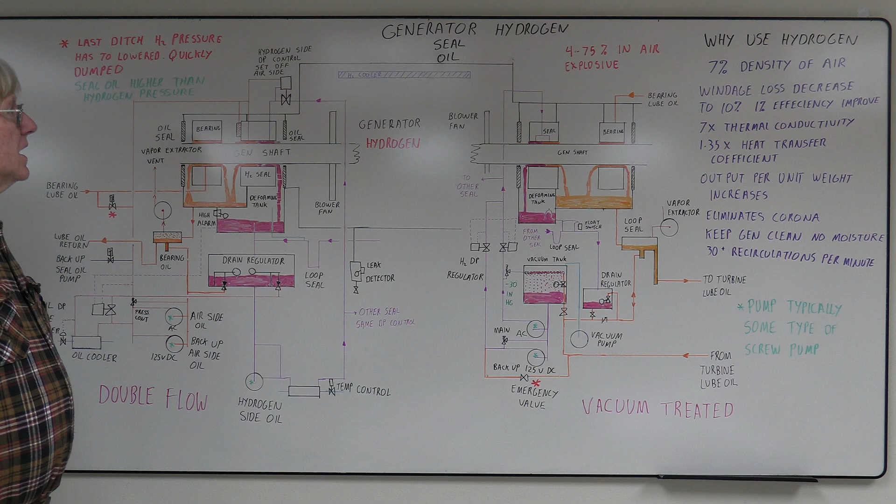Okay, it's our hydrogen generator seal oil video. Have to apologize for the mess. It started out as kind of a clean drawing. Now it looks like a seal oil skid. Time we put a lot of the stuff on it.

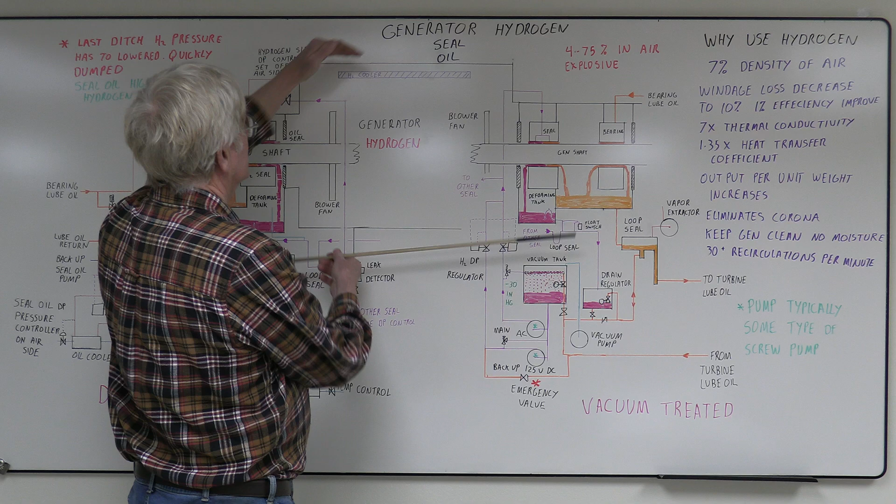The basic layout of this drawing: this part here is the actual generator. You have your hydrogen cooler. Some have them on top, some have them on the ends. But you're using water to cool the hydrogen.

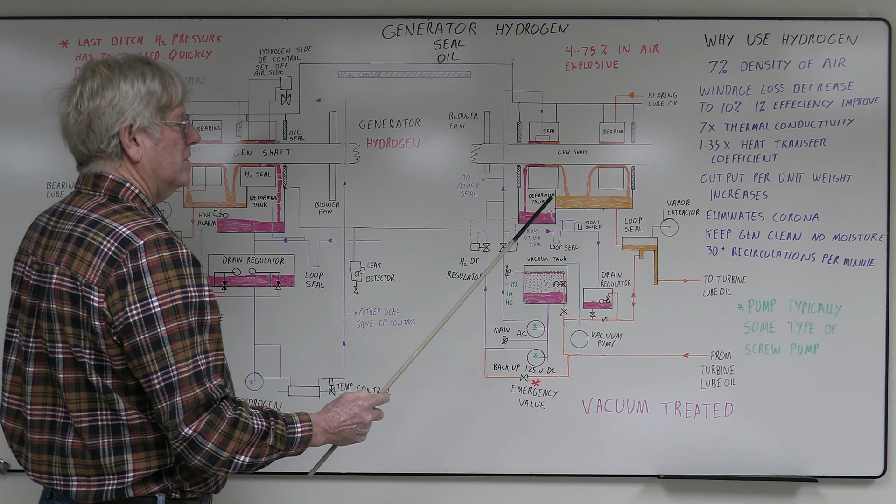This would be the generator shaft coming through. One end's the slip ring end, one end will be the turbine end. We have two different seal oil systems we're showing on this.

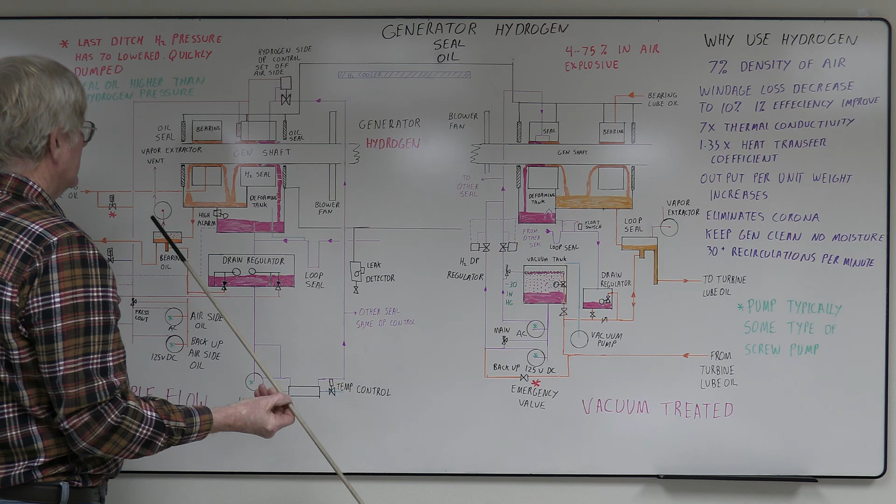The seals, this part here will be on the bearing frame, generator end of it. You won't see all this. If you look underneath, you'll see some of the lines going in and different parts of it. Same as this end, this will be the generator bearing housing end of it.

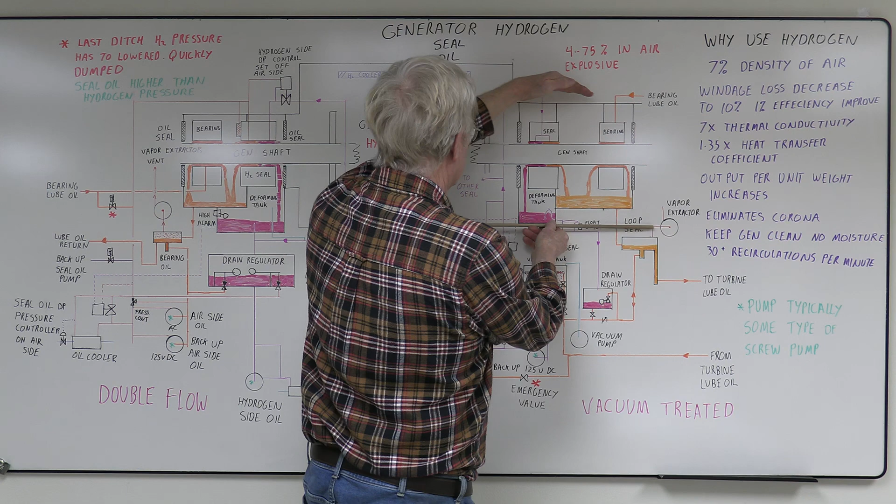The dark pink is the hydrogen side seal oil. The orangish yellow is the turbine lube oil on this. The one system is a vacuum treated seal oil system, it's a little simpler. And this is a double flow hydrogen seal oil system, it's a little more complicated.

The purpose of the seal oil is to use oil to lubricate the seals. Anytime the generator shaft is turning, you have to have seal oil on to prevent from damaging your seals. They also keep the air out of the unit and hydrogen in the unit.

In reality, these seals are probably a little smaller than what I'm showing here. They're not very big in reality. We drew it kind of big to try to make sense of this.

The basic principle of operation, you're using oil, same as the turbine lube oil. Part of the oil flow is inside. This keeps the hydrogen in the unit. A slight amount of hydrogen is picked up with the oil.

The other part of the oil flows out and keeps the air out of it. You have to have fairly clean oil, otherwise you're going to release moisture and air into the generator housing, contaminating the hydrogen.

This system, the vacuum treated, is quite a bit simpler. You have oil come from your turbine lube oil system. There's a valve, a level control valve in the vacuum tank. The oil is sprayed in the top.

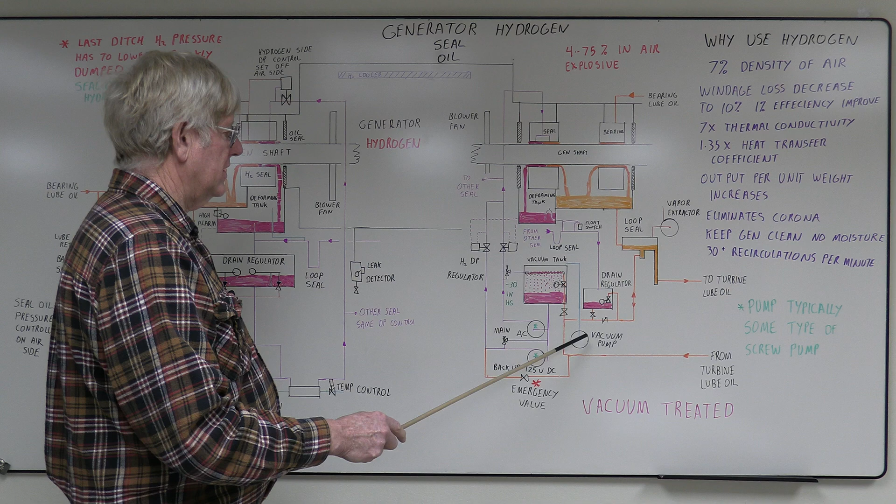This is under a vacuum, probably 30 inches of mercury, something right around there. You have a vacuum pump that pulls vacuum on it. This removes any air, water, any contaminants.

From here, the oil is pumped through a gear type pump. There's a relief valve that maintains the pressure. About 2/3 of the oil is sent back to the vacuum tank, so there's quite a bit of contact area between the oil and the air in here. So this removes most of the dissolved gases and moisture out of it.

From here it goes to your seal oil regulator. These are very accurate regulators. They have the seal oil on part of it, then the other part is the hydrogen side.

A lot of them I've seen, they're taking the hydrogen pressure off the oil tank, which is under the hydrogen pressure. That way you're not having hydrogen gas come down to this. But this maintains the seal oil above the hydrogen pressure. This unit's about 8, there's different pressure ratings depending on the manufacturer. So this is maintaining the seal oil above the hydrogen pressure. That's the key part of this.

From here, the seal oil goes up to your seal. This just has one line feeding in. There'll be the same setup on the other end of the generator. Seal oil is split, part of it goes to the hydrogen side and part goes to the air side.

From here, the air side combines with the bearing oil coming out, so this oil is sent together to a loop seal tank. This is like an enlargement or de-entraining tank. There's a vapor extractor on it trying to pull vacuum to remove any hydrogen gas out of this. From here, the oil is going back to the lube oil tank.

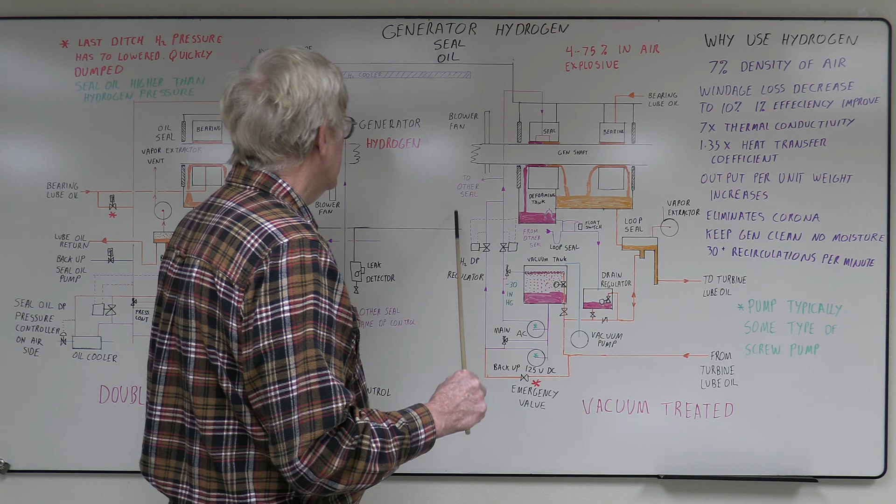They do have leak detectors on these on both ends, and usually one in the middle, depending on the size of the unit, to tell you if you're starting to have a problem with seal oil running back in. Drain regulator tank.

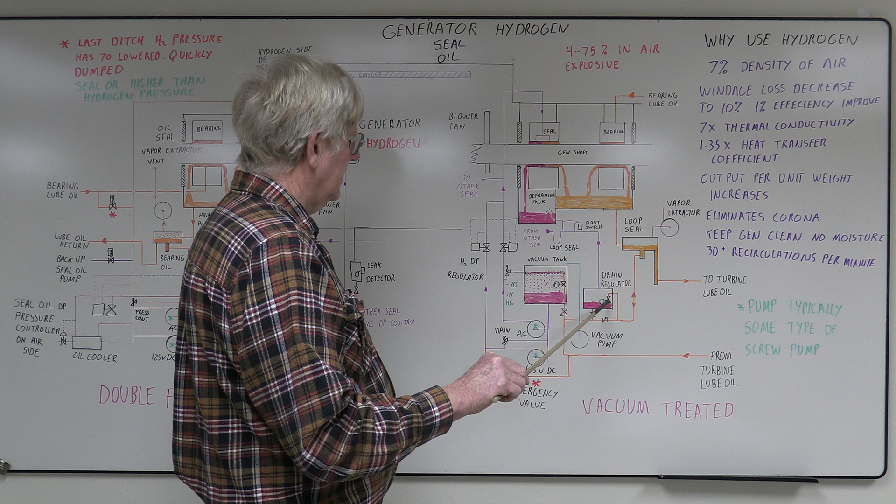It's the same pressure as the generator hydrogen. There's a float valve in here that maintains a level. It just de-entrains any hydrogen. Lines are big enough they can flow back up through this vent, so it maintains pressure as the generator hydrogen. Here, the oil returns back to the loop seal, any vapors extracted.

If the turbine lube oil system shuts down, it can take oil off the loop seal tank. The vacuum will pull it in, goes through your pump back up, and instead of going back to the turbine lube oil, it's recirculated back.

The problem with that, it'll build up heat in time. There's a backup 125 volt DC pump. They all have backups on these.

You do not want to lose your seals with a generator that has like 60 pounds hydrogen pressure or even more. There's a lot of hydrogen from the bigger units, and that coming out can be a bad deal.

One rule of thumb: keep your generator pressure where the next backup system can handle it. So this backup pump will run the same as the main oil pump, but your next backup is the bearing lube oil, which would hold the pressure down to maybe 2-3 pounds hydrogen pressure on here instead of what you're normally running at. So this is really an emergency backup.

The problem with this, you cannot maintain much hydrogen in the generator. You'll have to dump this real quick.

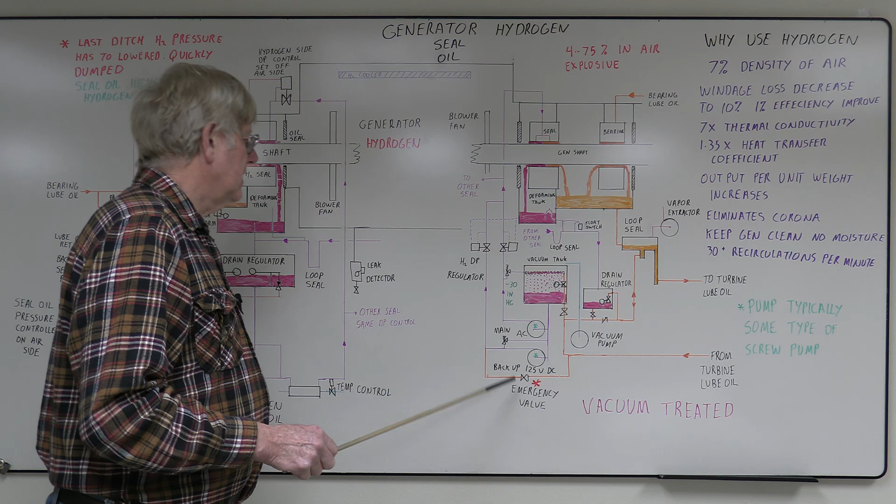So this is a fairly simple system for smaller units, vacuum treated. Turbine lube oil comes in, strips out all the dissolvable gases and moisture. It's pumped up through a seal oil regulator, maintains this pressure above the hydrogen pressure, so you can force oil in to seal, and the oil goes out to keep the air out.

These seals float, they're pinned so they won't turn, so they have to move. It's really a good sealing system. A mechanical seal wouldn't work.

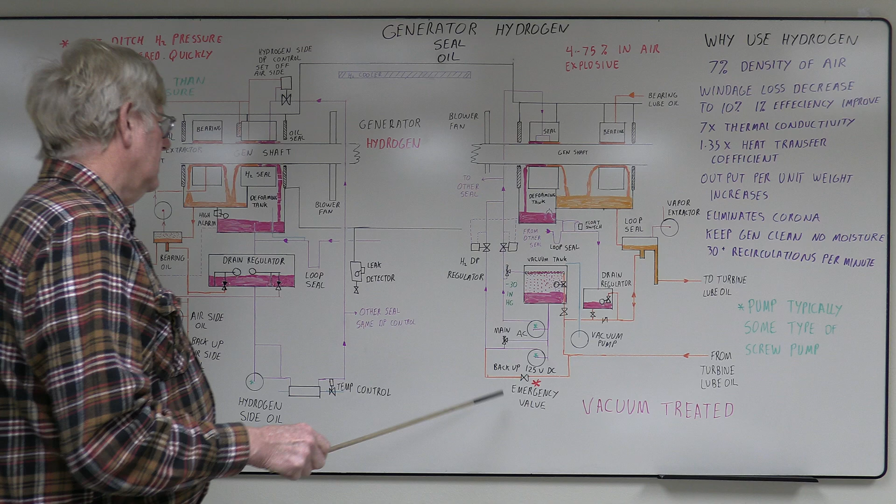This is the double flow. This is a little more complicated. Same color scheme: dark pink is the hydrogen side, orange yellow is the bearing oil side. This has two separate pumps on it, two separate systems.

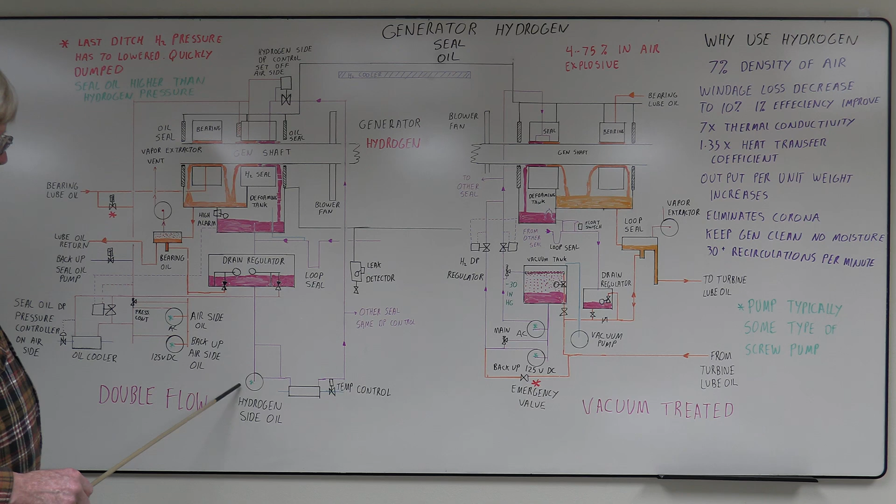We'll start with the hydrogen side oil pump, another gear driven pump. It comes off, there is a pressure regulating valve. Since it's a gear pump, you have to maintain flow through here. These have oil coolers, temperature control. Should run like 110 degrees or something to try to cool the oil going back.

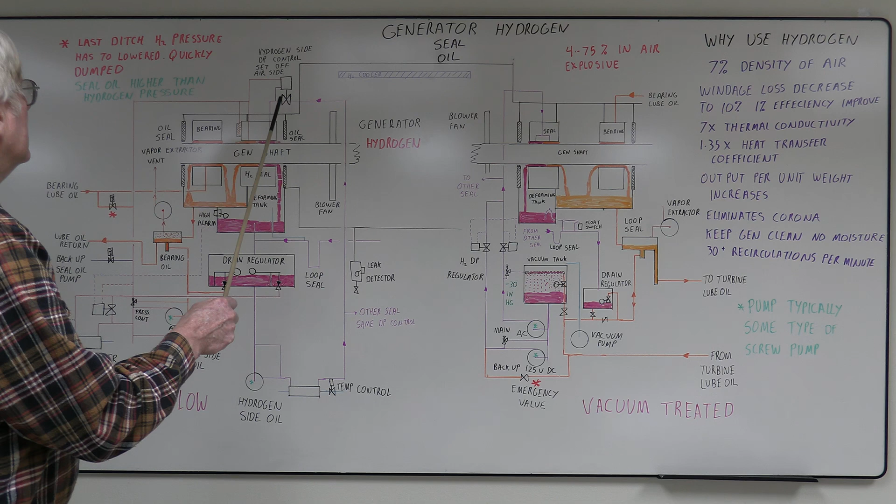Okay, this is the same setup. They'd be the same seal on the other side on the generator. Hydrogen side oil comes up. This will feed the other end. It comes into the generator side hydrogen seal.

This has a hydrogen side DP control that's set to the same pressure as the air side. The air side is actually doing the controlling of the seal oil pressure. So this valve maintains the pressure across the air side, and hydrogen side the same pressure.

In reality, this would be sitting down here on the skid. I do it up here just for convenience.

Okay, the generator side comes in, part of the oil here hits the air side oil, so then it flows back to the generator side. This is the hydrogen, goes to a defoaming tank. They've got a high level on it. Like I say, these, if you look underneath the generator end, you might see a little change in the housing where this is located.

From here it goes down, it's called a drain regulator tank. This is the hydrogen side seal oil. You have one valve that lets oil in to maintain the level.

This is coming off the air side. This is a drain, opens up and dumps it back to the air side suction or the turbine bearing. So there's two floats in these that maintain the level. From here it goes back down to the hydrogen side pump. So this is the flow loop of this: the hydrogen side, this pump, oil cooler, control valve.

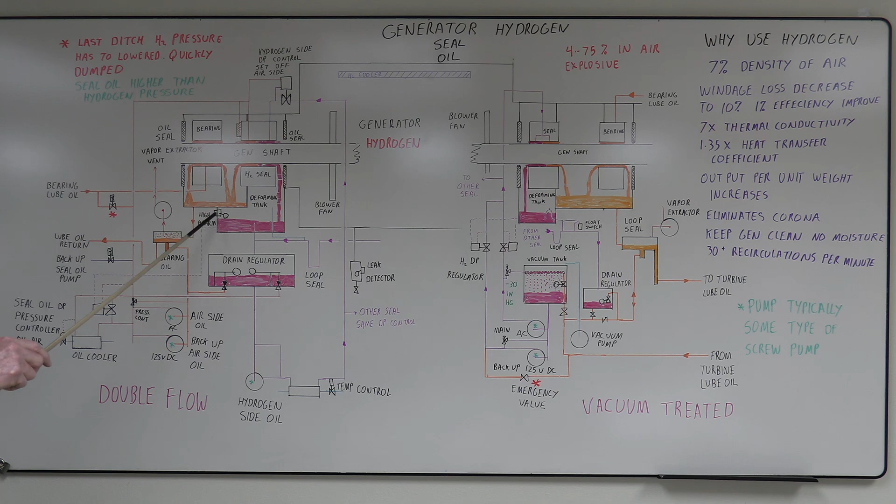Same scheme. They're taking the seal oil pressure and then they're also coming off the defoaming tank. This will give you your hydrogen pressure without bringing a lot of hydrogen down here. From here you have your 12 pounds pressure.

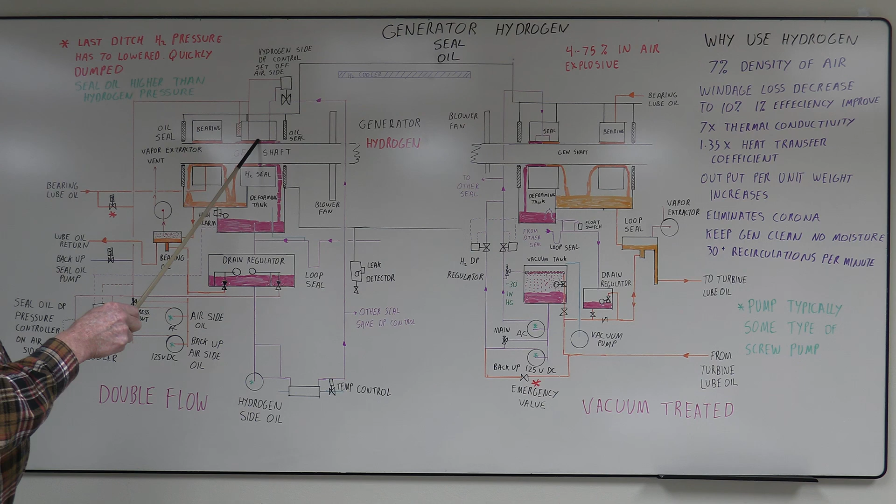Now it's fed up here, feeds into the seal. The air side comes in, hits the oil on the hydrogen side, and it flows back. So there's kind of a barrier here. The oils stay separate.

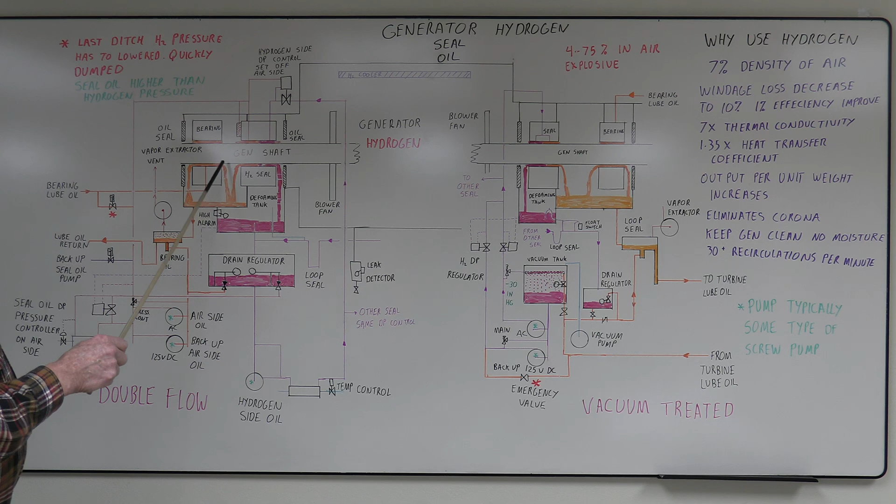Here the oil drains off with your bearing lube oil. Drops out. You have an enlargement or loop seal tank.

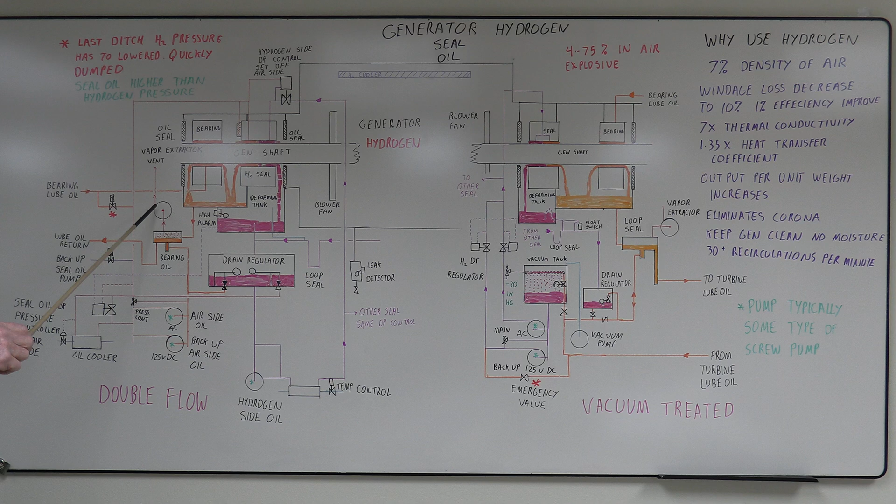Another vacuum pump on it, vapor extractor, trying to remove hydrogen gas. From here, the excess oil returns back to the lube oil tank. You have your suction line coming off to the air side. So this loop runs continuous like this.

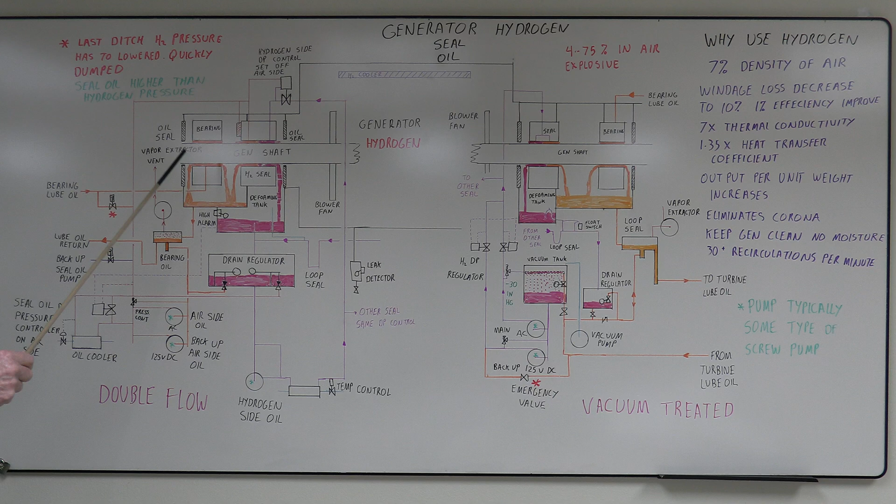The big thing on these is backup. You have a backup air side DC oil pump on this. It'll maintain the same pressure as your air side pump.

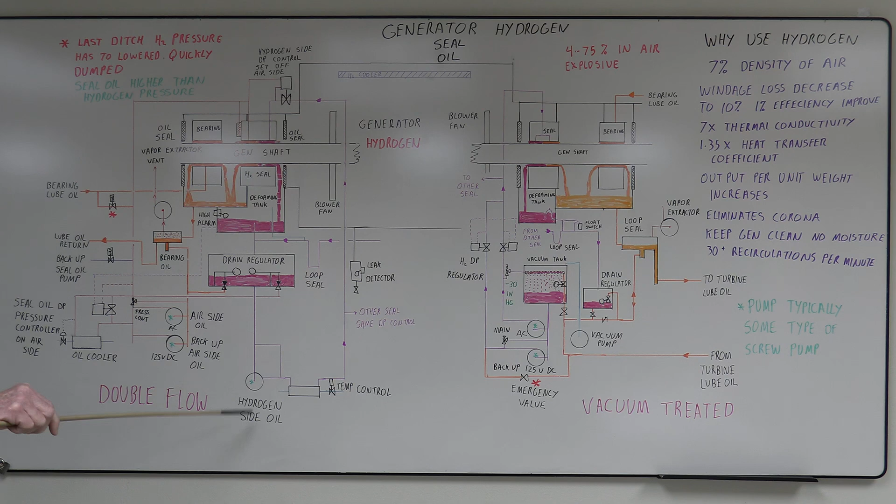If you lose your hydrogen side pump, it doesn't really matter. Your air side will take over the sealing job. That's why they got the seal pressure regulator on the air side. So if you lose this, the air side will back up.

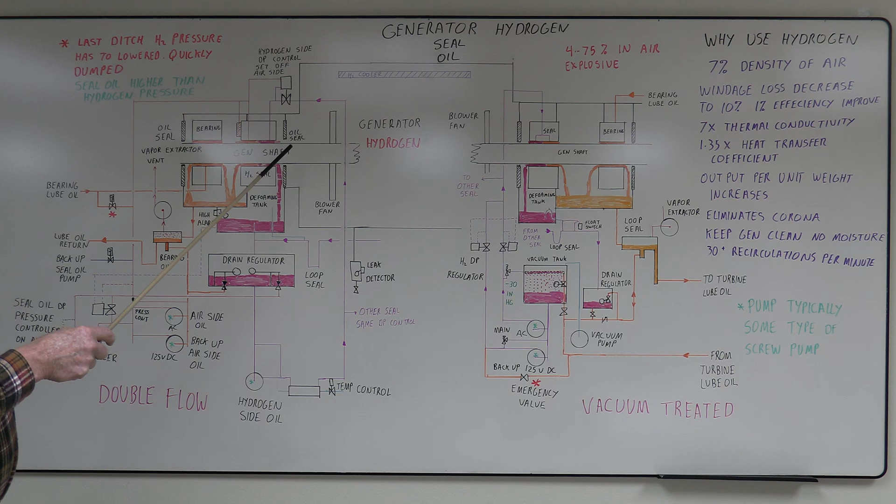About 2/3 of the oil going through the seal is on the air side. So just to run the air side pump, you can still seal the machine. But you will introduce a lot of contaminants into the hydrogen. So if you're running just the air side, you're going to have to probably purge more on the hydrogen to maintain the purity in the generator.

So you have your 125 volt DC backup pump. This pump here will maintain the seals. Some of these have float oil on them that float the seal.

Like I say, the seals float. There's a lot of dynamic balancing on it. Some have floats, some have different float pumps. There's different schemes to this, but this is the basic scheme for this.

Okay, if you lose these 2 pumps, there's a backup seal oil pump that'll run. The pressure regulator dumps the oil in. It will maintain the system.

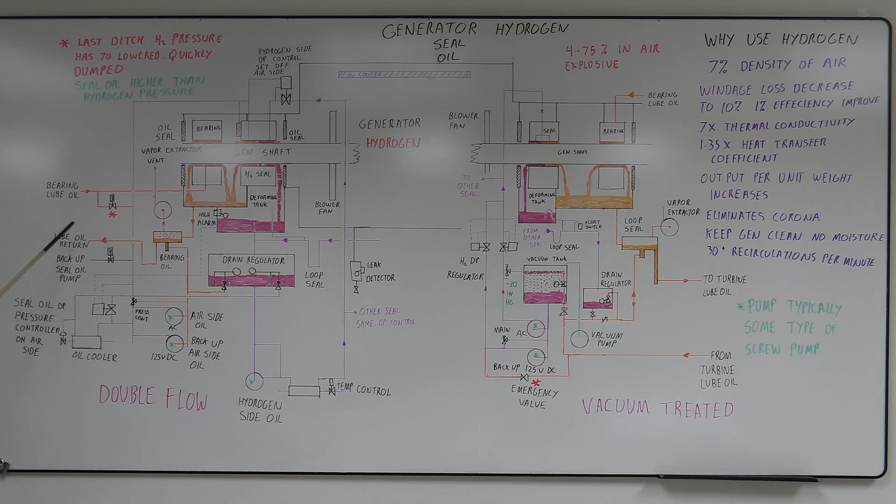You also have your pump off the main turbine that puts high pressure out. You can get oil back in here, maintain seals. If you drop down to bearing lube oil, you're in trouble because this has to be dropped to 2 pounds. It does not have enough pressure to maintain this.

I believe this will stay sealed as long as you have 3 pounds seal oil higher than the hydrogen pressure. On your last ditch, you got to dump the hydrogen quickly if you lose your seals. Seal oil is always higher than hydrogen pressure.

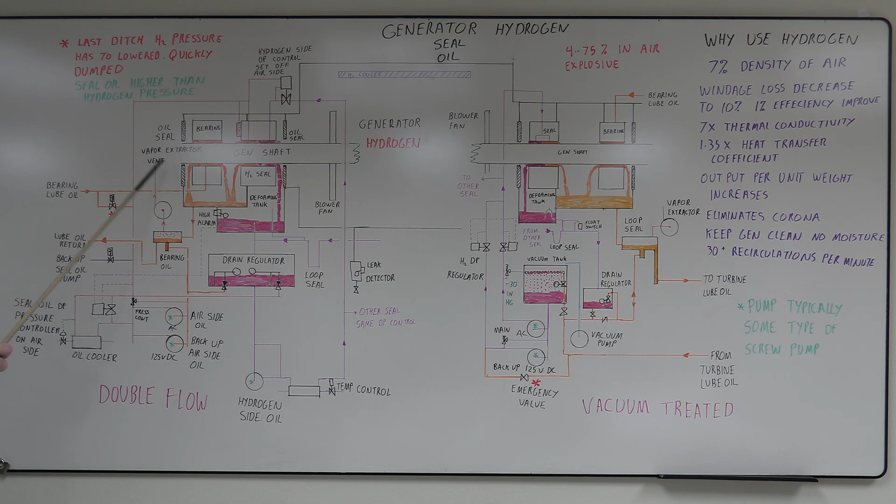You do not want to run a generator without seal oil on it. It'll damage the seals. Like I say, in reality, these seals are probably about that wide. They're fairly narrow, come down to 2 nozzles, a whole bunch more nozzles on the air side than the hydrogen side.

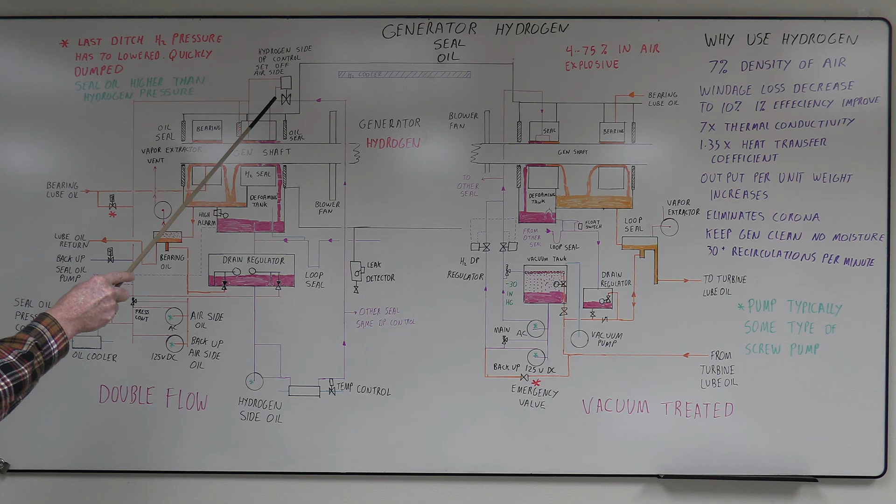Say these regulators maintain hydrogen side pressure equal to the air side. They should be within an inch or 2 at most. These are all sitting down on the skid. So this whole part here would be on your skid. That's why there's such a complex piece of piping.

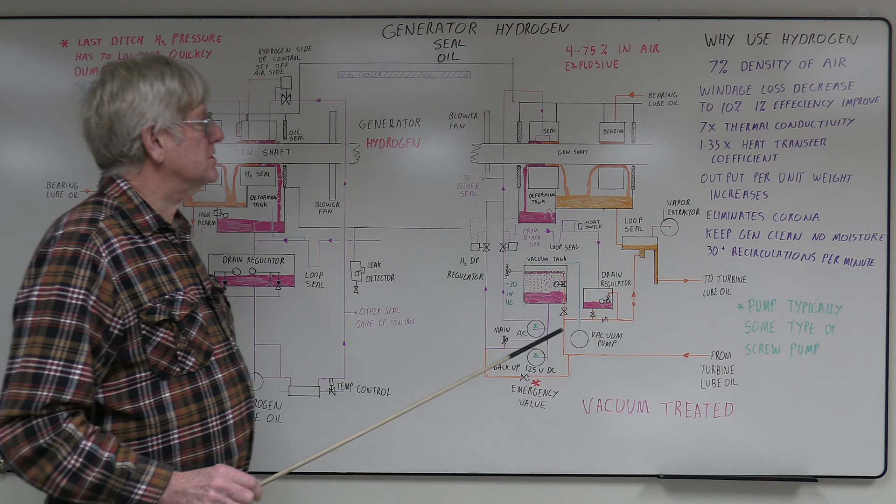Why do we use hydrogen? It's 7% the density of air, so the windage loss decreases - if you're using air you'd lose about 10%, so you get a 1% efficiency improvement. It also has 7 times the thermal conductivity and 1.35 times the heat transfer coefficient, so it pulls heat out of the windings and rotor much better.

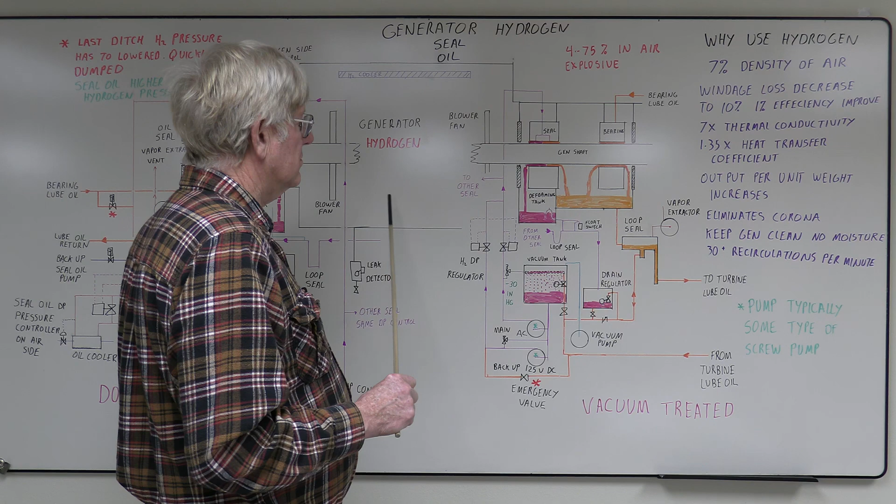Output per unit weight increases, so you can have a higher megawatt output machine for a lot less material and cost. It also eliminates corona damage to the windings and keeps the generator clean and moisture out.

Some of these run like 30 recirculations per minute. You have your fan blower and rotor, so it's shoving the hydrogen down the rotor, and there's a bunch of holes blowing it up through the stator windings. The coolers can be on top or on the ends, depending on the setup.

They do have leak detectors looking for cooler leaks and seal leaks, so if you get those going off, you need to pay attention to what's happening. Some of these blowers will put out like 3 pounds of pressure across here.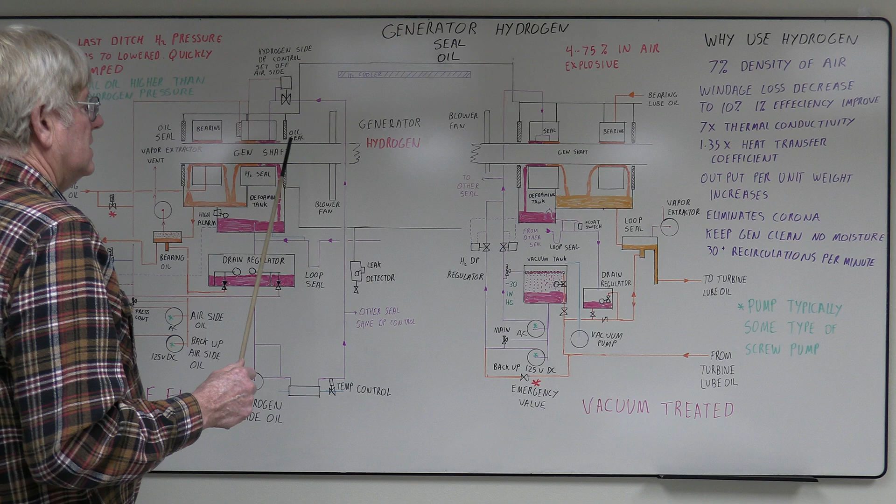Big thing about hydrogen - it's explosive from 4 to 75% in air. It's lighter than air, so it'll collect at high points. If you're welding or working around these areas, you should probably purge out the generator.

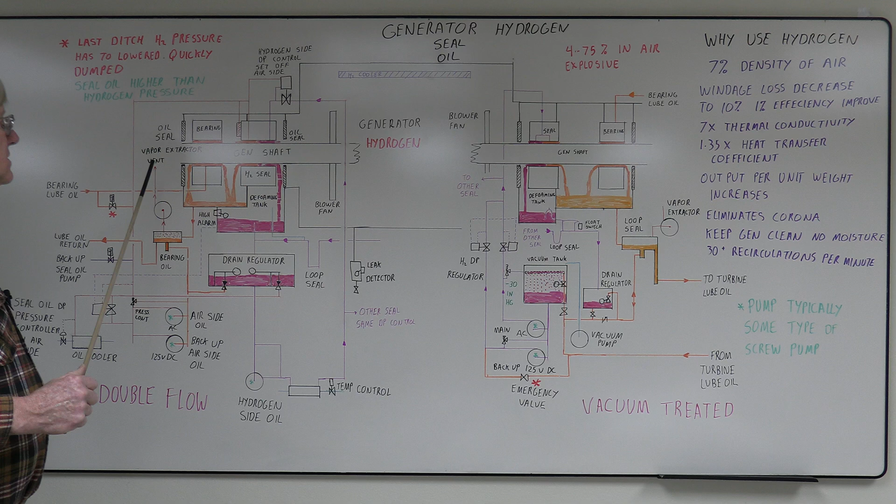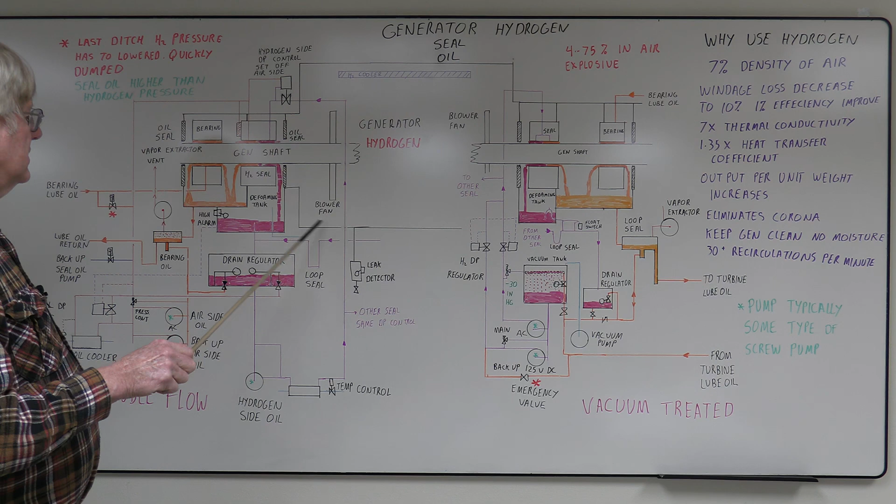Anytime you drain these systems, or even put this thing on air, you first use CO2 to get the hydrogen out, then use air to get the CO2 out. There can still be hydrogen trapped in various pieces of equipment, so anytime you work on this, you've got to be aware of hydrogen.

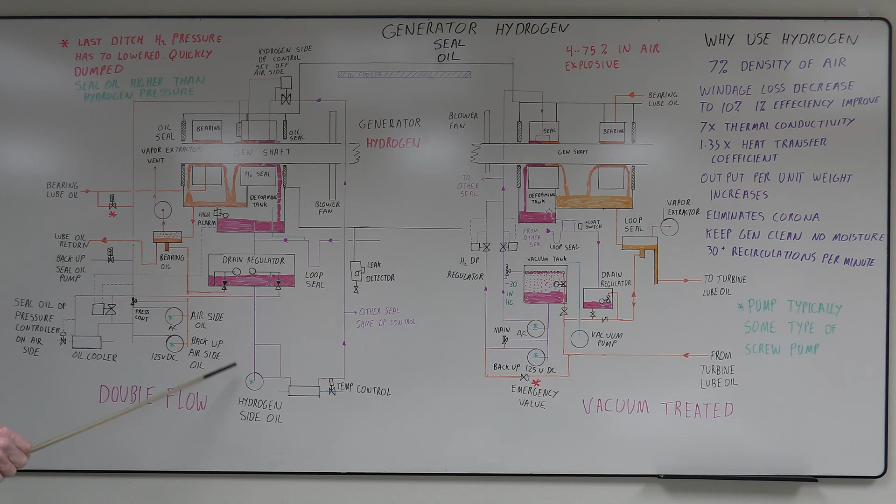These units are pretty sensitive. I wouldn't be adjusting any controls unless you know what you're doing on them - you can create a lot of problems quick.

The big thing is you need to keep the hydrogen in the generator. On some of the bigger units, the higher the pressure, the more heat they can remove and the higher the megawatt load, to a point. At higher loads you'll have to use water-cooled windings. There are different things they can do to increase the power output, but basically, the higher the hydrogen pressure, the more generator load it can put out.

On smaller units, this is real - you'll see a lot of this. Some will run at half a pound and put out 13 megawatts, and then if they go to 30 pounds, they can put out 28 megawatts.

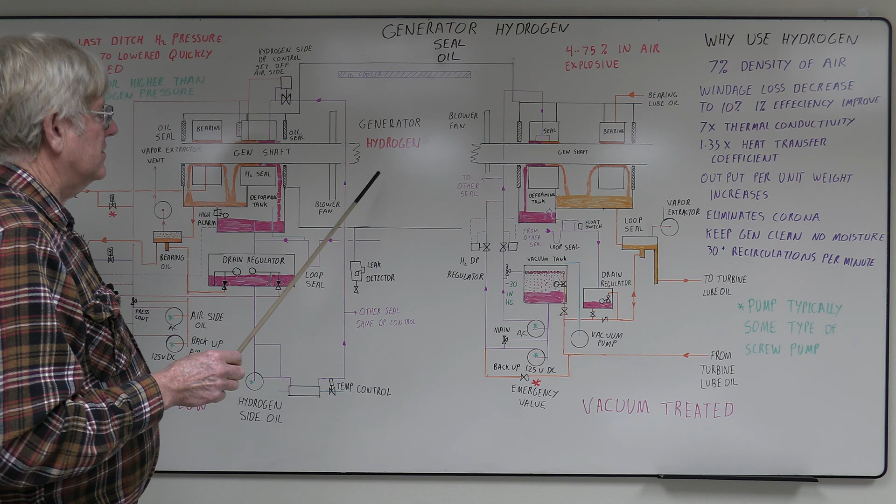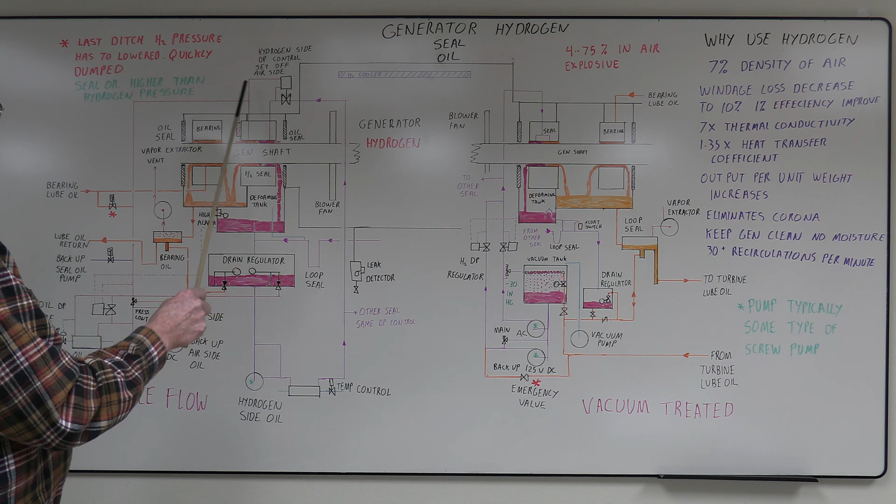Anyhow, this is kind of a basic overview. We don't have any of the pressure switches or a lot of the other stuff on this. They have seal oil strainers on the discharge to keep debris out from plugging the holes up, and some other things. They usually run fairly well and are kind of forgotten about.

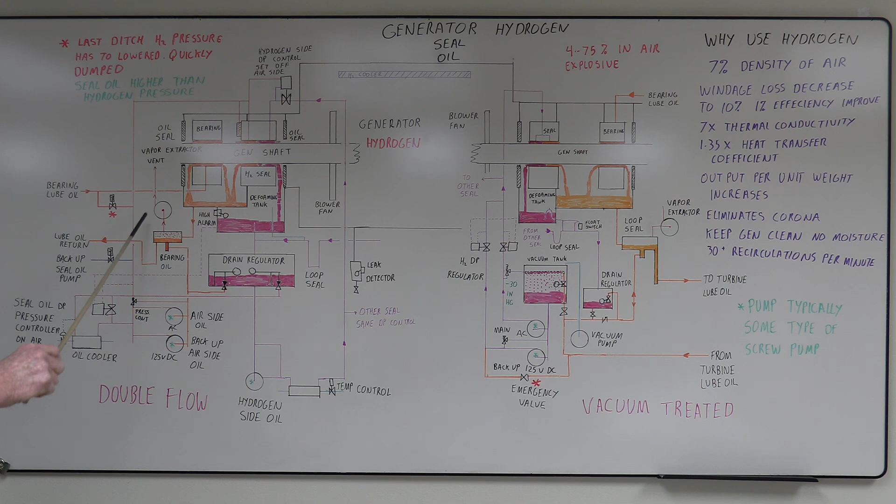The dark pink is the hydrogen seal oil, the orange-yellow is the bearing oil. This one has 2 separate systems running. Your seal oil pump runs through a cooler keeping this oil circulating. This one has a lot of bearing oil going back through it, so it's a little dirtier, but it's a good backup system - if you lose this, the air side takes over instantly and keeps hydrogen out.

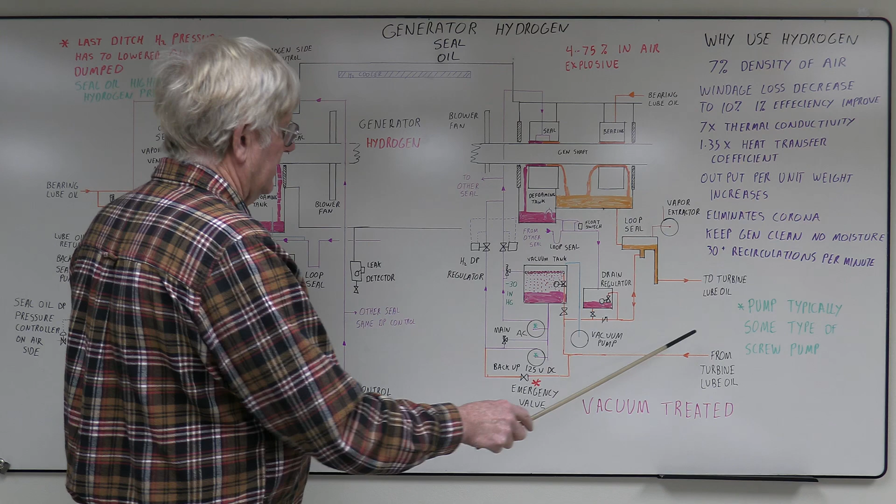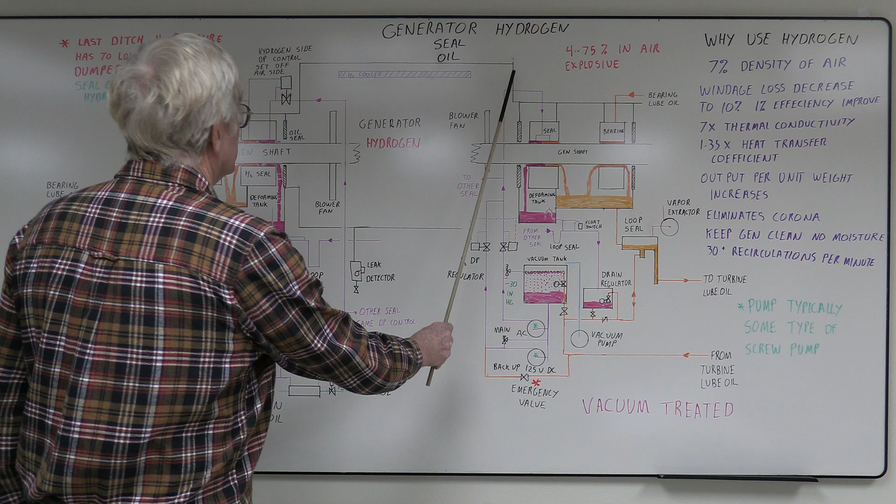This one's a lot simpler - you have one line coming in from the turbine with lube oil, it flows through, and all the oil ends up going back to the turbine. This is the generator part here, these are the generator bearing ends. It's not drawn to scale, but it's just trying to demonstrate 2 different systems and kind of how they work.

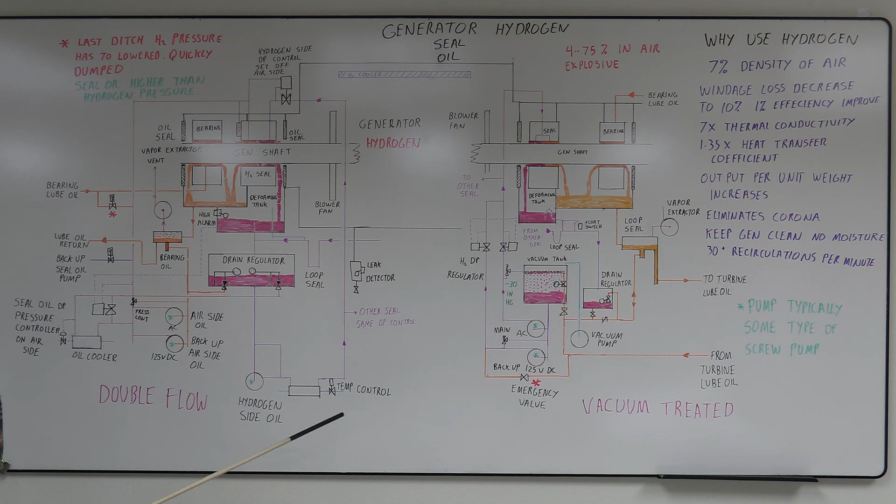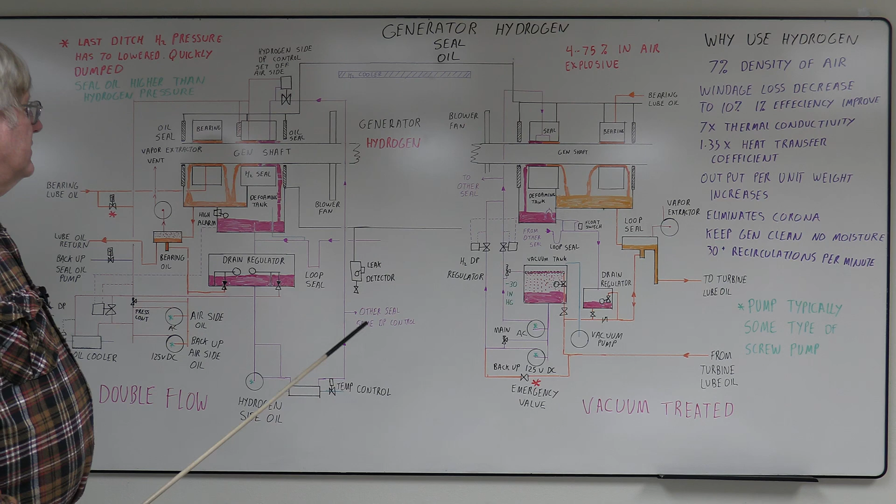The big thing is they want to keep the hydrogen in the generator, keep the air out, and lubricate the shaft seals. Anytime you're working with hydrogen, you need to be very diligent - just remember that it's lighter than air and will accumulate in ceilings and high spaces.

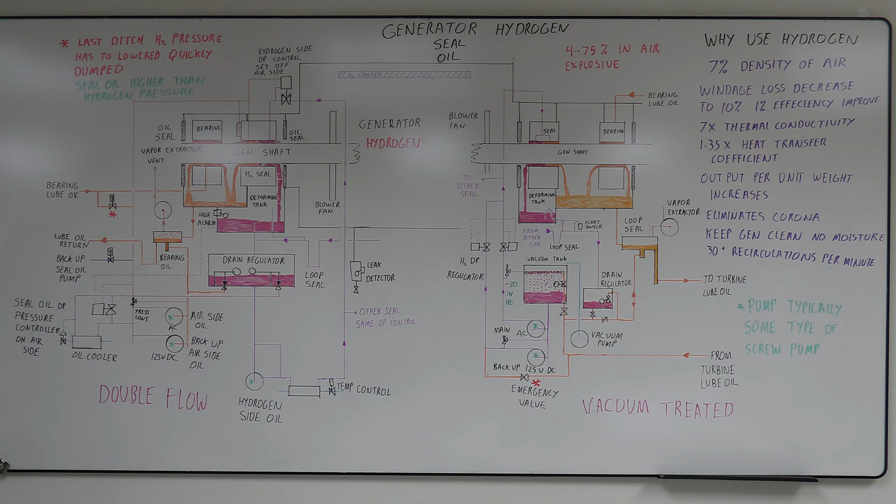Anyhow, that's our generator hydrogen seal oil system. Hope that wasn't too confusing. If you look at any of these seal oil skids, they do look pretty confusing, but they're really fairly simple, just with a lot of backup stuff on them. And that concludes our video.